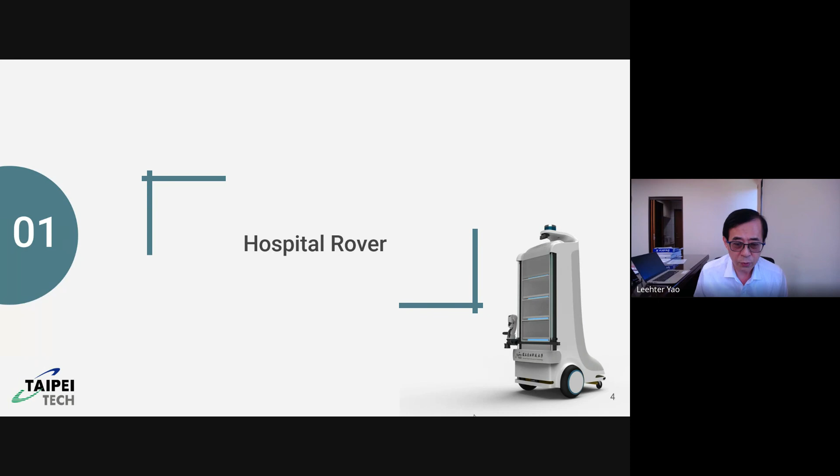The first thing I'm going to share with you is a typical example of integration of AI with machine, which I call the hospital rover.

The hospital rover is motivated by the idea that we usually take public transportation or drive a car from one place to our destination, but is it possible that we don't have to drive ourselves in order to carry objects? So we are going to design an autonomous robot that can carry objects for us.

The hospital rover comes from my campus rover. This is my first generation and second generation. Some professors in our industrial design department designed the outlook for me, so it looked more beautiful.

In this campus rover, we have 3D LiDAR on the top and 2D LiDAR at the bottom. We also have a robot arm to operate the elevator, and a depth camera that can not only sense images but also measure distance. And of course, we have actuators.

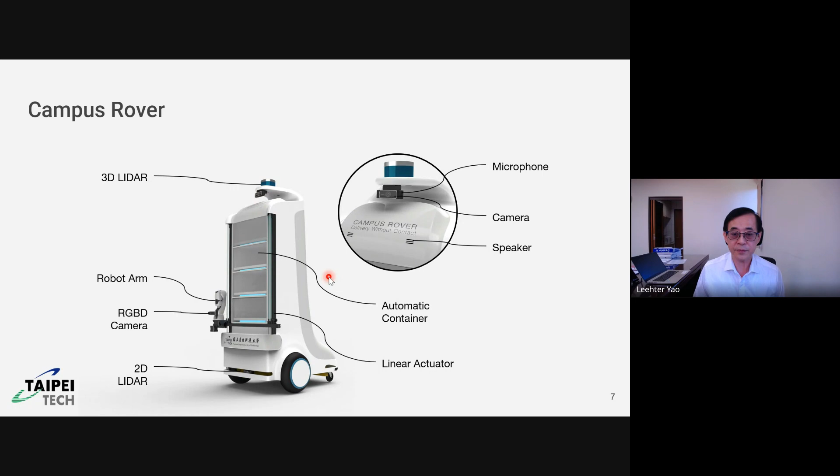My goal is to design an autonomous vehicle or mobile robot for indoor use. I'm not going to compete with Tesla, Benz, or BMW - they have thousands and thousands of brilliant engineers to design autonomous cars running on the road.

So there is a space for us to design the so-called indoor autonomous vehicle. That's why I was motivated to design my indoor-use autonomous vehicle, and of course, some of the functions I had to consider before my design.

I have to make sure that my indoor autonomous vehicle also has a limited function of outdoor self-driving capability. Of course, we have to emphasize the self-driving in the indoor space, and the indoor environment is much more complicated than the outdoor environment.

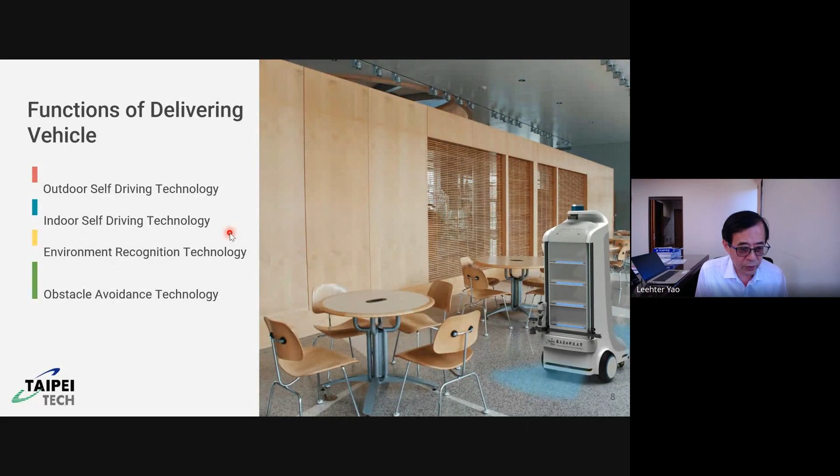So we also have to have the capability to do environment recognition, and most of the time the building is full of people and stationary obstacles. So obstacle avoidance technology is also very important for the indoor autonomous vehicle.

Since the mobile robot is operating inside the building, if we want to go from this floor to another floor, we need to design this robot to be capable of operating the elevator. So we have to design this robot arm to press the button of the elevator.

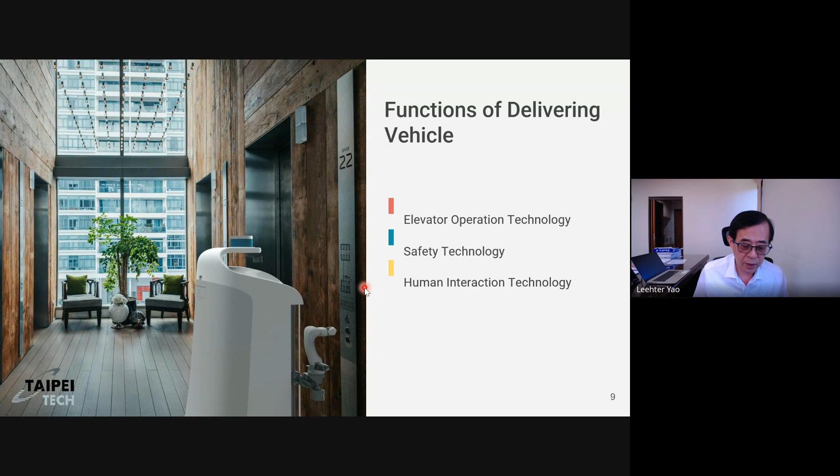Because this robot is running inside the building, we also have to be careful about safety. Finally, we also have to have a good human interaction interface so that it will be friendly to users.

Because we want to design the robot to deliver objects from one place to another, we don't want this—see, for example, we have a drawer here, and we put the object we want to deliver inside this drawer. During the traveling, we don't want anyone other than the intended recipient to open the drawer easily, so that the object can be taken.

We don't want people who are not the target personnel to receive these objects. So we have to have good authentication technology to make sure that the one who opens the drawer is the one we want to send the object to. Otherwise, anyone else cannot open the drawer to take away the objects.

During the traveling, we also have to have some lighting and audio signaling technology to remind pedestrians that this robot is coming, so that pedestrians will be more careful about this mobile robot.

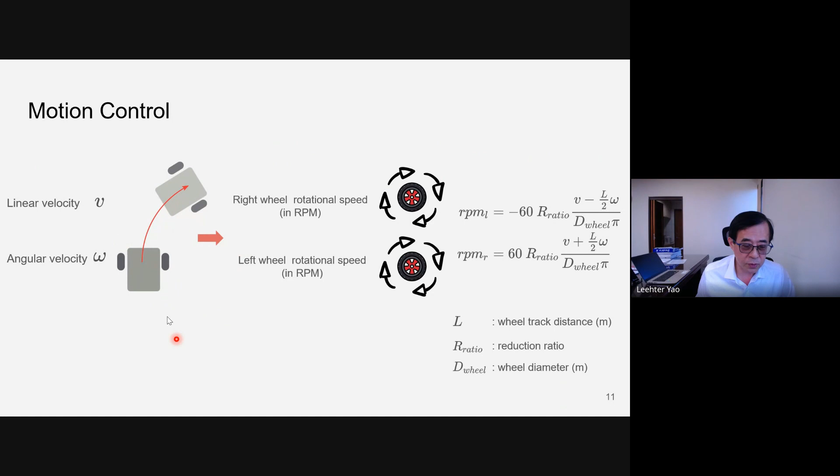We also have to worry about the odometry of the robot, so that we know where this robot runs, and we can calculate the path of this robot.

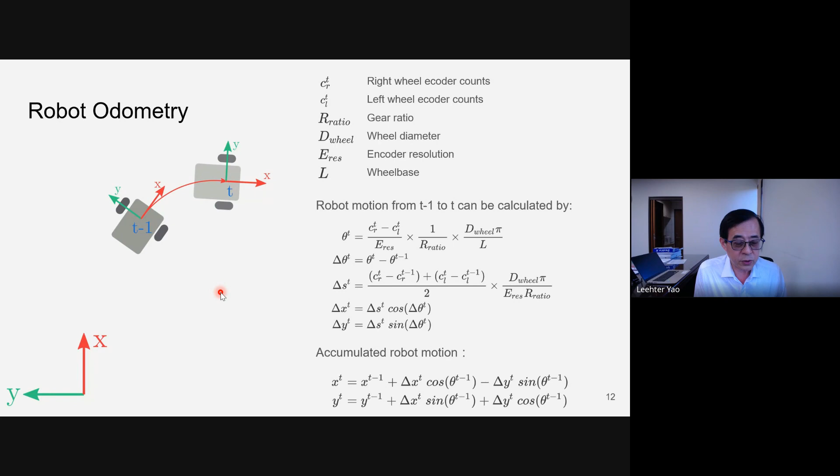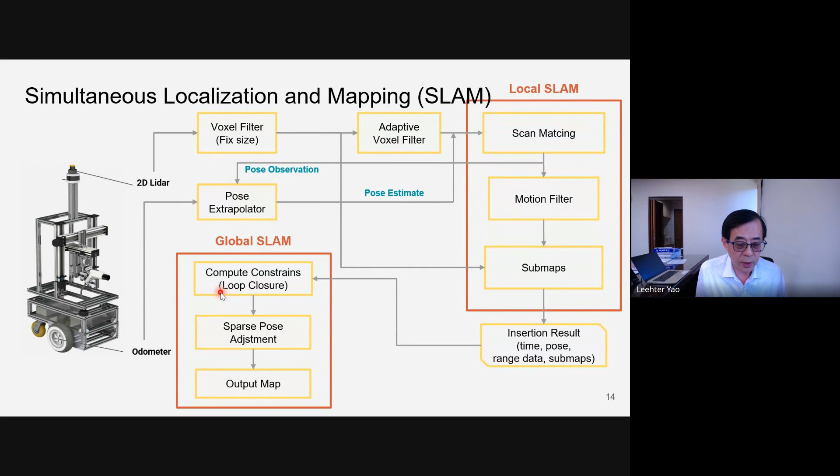We also have to have the capability to design the traveling route or path. Before doing that, we have to use the so-called SLAM, simultaneous localization and mapping technology, so that this robot is able to collect the map inside the building.

For example, before designing the path, we control the robot to go through the environment several times. This mobile robot travels around, and during the traveling we collect the map information. Then, based on this map information, we will be able to design our SLAM.

We design the route based on the map this mobile robot collects, and we put several decision points here, so that wherever this robot is called to go, it is able to automatically calculate the best route. In this mobile robot, we use the so-called Dijkstra routing algorithm to automatically calculate the route.

During the traveling, we also have to design a CNN to recognize the objects this mobile robot might encounter, especially since this robot is going to be used in the hospital. So we have to recognize pedestrians, wheelchairs, beds, or other kinds of vehicles used in the hospital, and of course we also have to recognize stationary obstacles and the elevator.

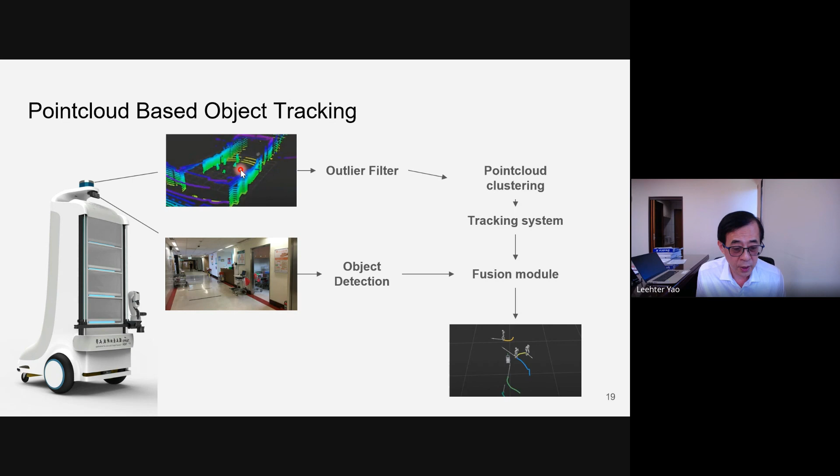So with different kinds of moving obstacles first detected by the 3D LiDAR, we then use sensor fusion technology to make sure what this object is, then design different obstacle avoidance approaches for different obstacles.

And of course, in order to better estimate the velocity of the moving obstacles, we have to design a Kalman filter so that the velocity can be estimated more accurately.

And this is an environment in the hospital. We have to use CNN, training on many different objects that this mobile robot might encounter in the hospital, so that we could recognize, I hope, 90% of the objects this robot might encounter.

So based on the sensor fusion of the 3D LiDAR and the camera, now we are able to know the objects.

Then we design reinforcement learning to do obstacle avoidance. The reason we use a reinforcement learning algorithm is because the indoor environment is much more complicated than the outdoor environment, and the space we could use to avoid obstacles is very limited and also very complicated. So we would like to use a reinforcement learning algorithm.

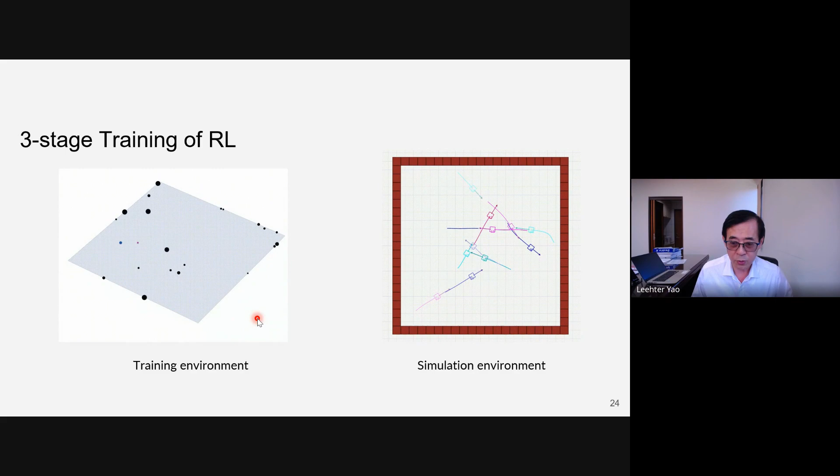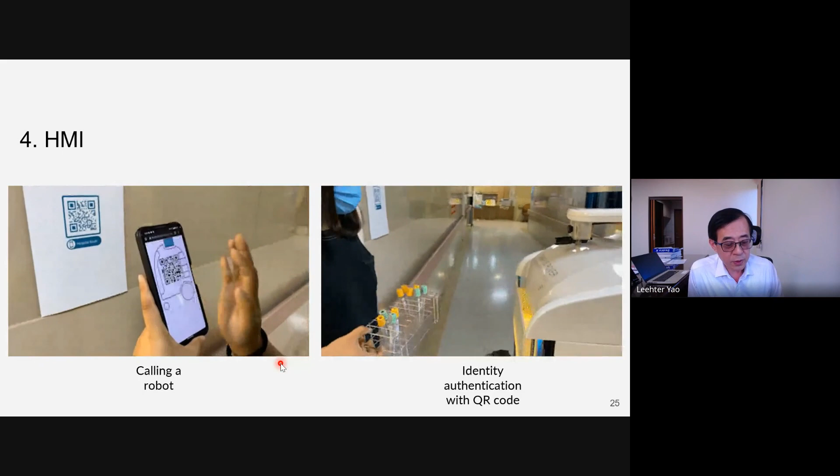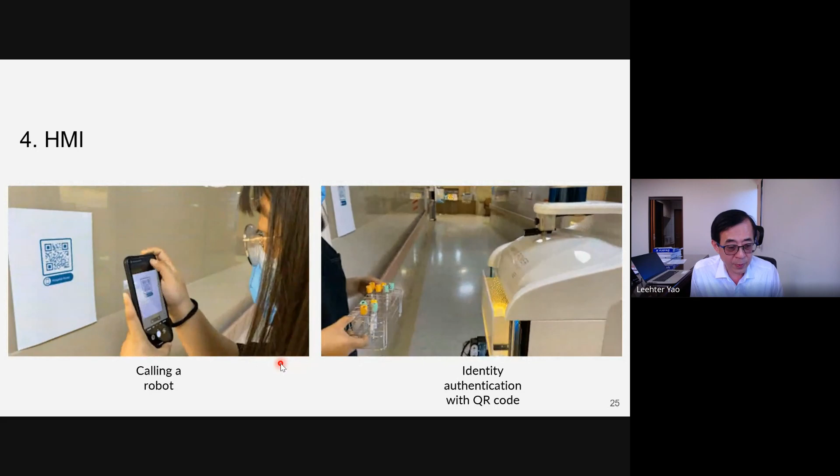All right, so we also have to design for, say, a doctor in the hospital. Now we use this mobile robot to send medicine from the pharmacy to the nurse station, so that the nurse station will open the door and dispatch the medicine to the patient in each room.

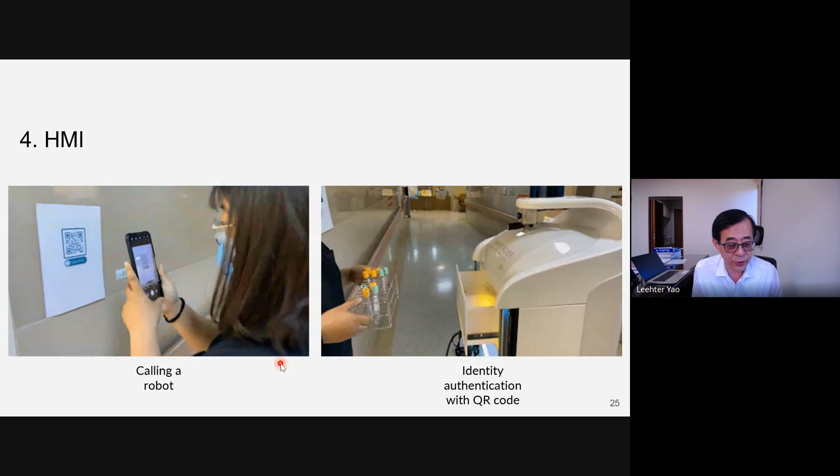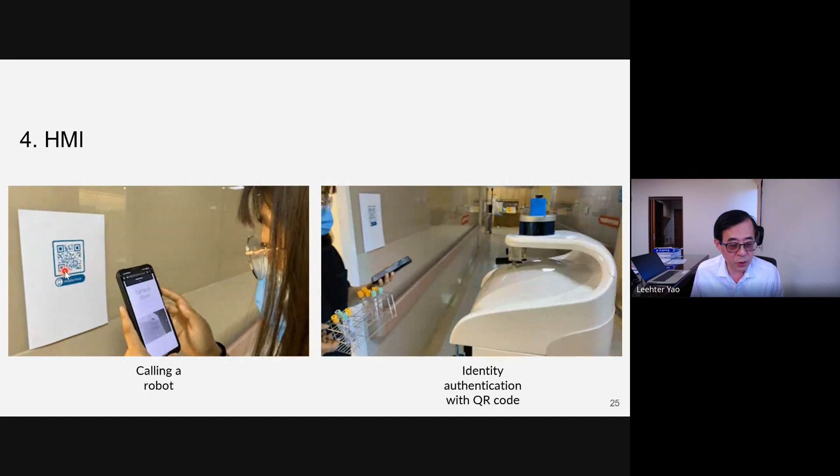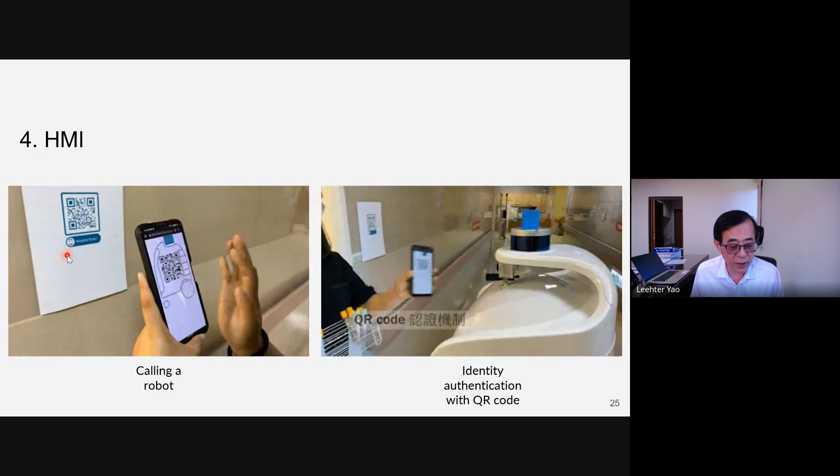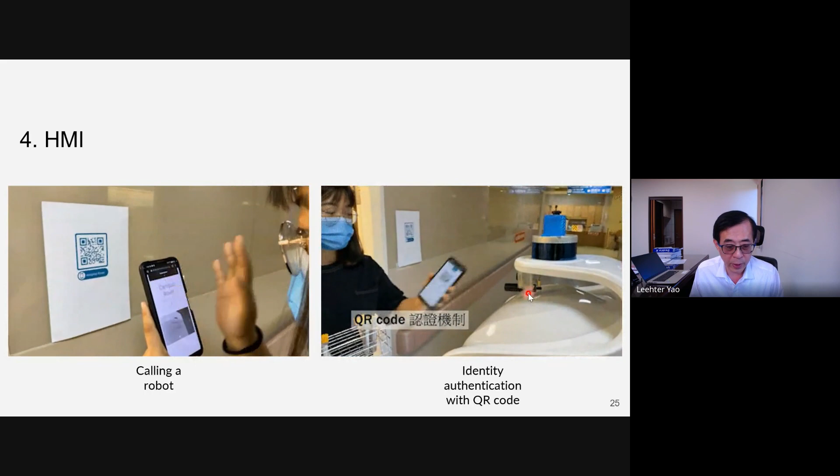So how do you call this robot? Maybe this robot is somewhere inside this building, so we design this QR code. We could put this QR code at every space inside this building, so that if the staff want to call this robot, they can scan this QR code. Then through Wi-Fi, this message will send to the robot, and this mobile robot will know where you are, and then it will travel. If necessary, it will also automatically operate the elevator to come to this place.

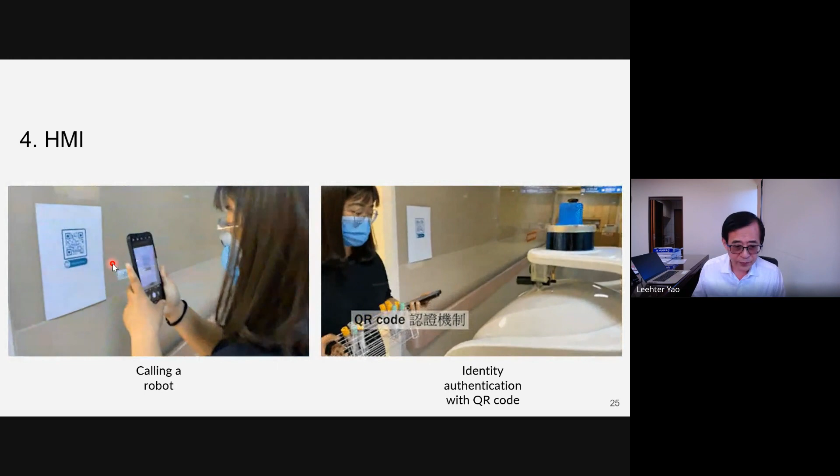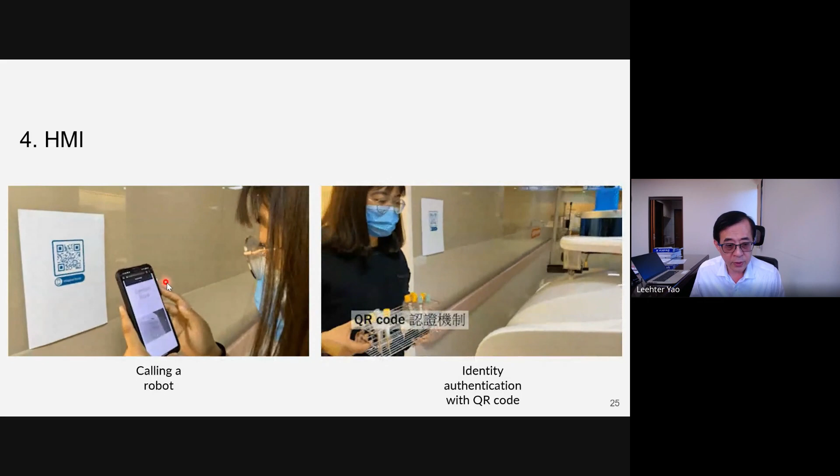Because we designed this app for the robot, if you call this robot, we will also at the same time give you another QR code. So you show the QR code to the robot, then the robot knows that you are the caller. So no one can ask this mobile robot to open the drawer except the caller and the receiver.

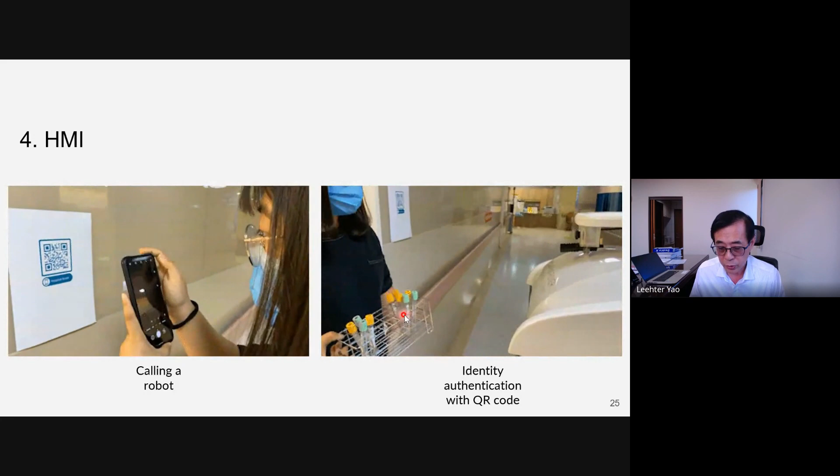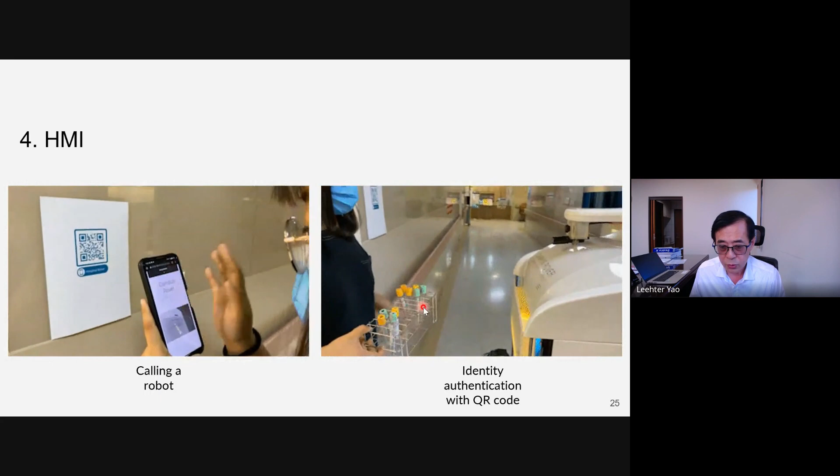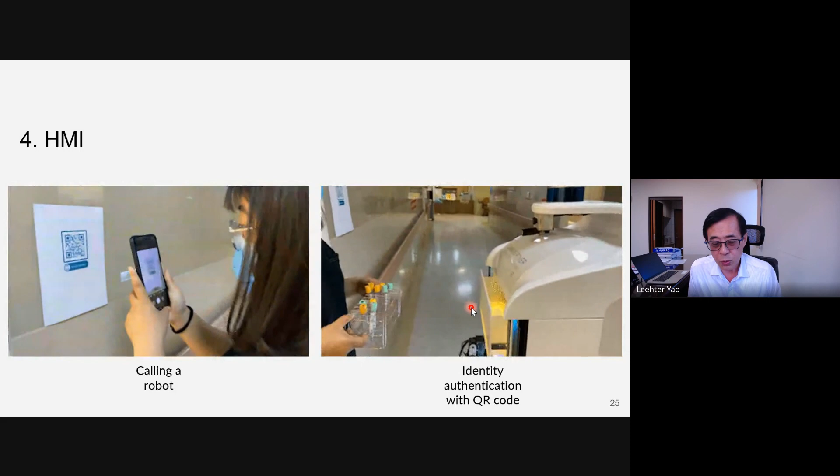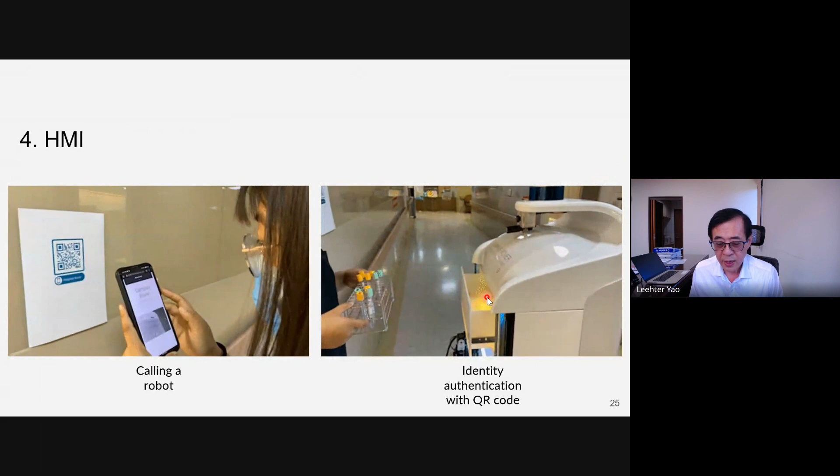You show the robot your QR code, and the drawer will open, and you can put the object to be delivered into the drawer. Your receiver also will receive the same QR code, so when the receiver shows the QR code, the object placed at the corresponding drawer will open, so that the receiver can only open the drawer you put the object into, and cannot open the other drawers at the same time.

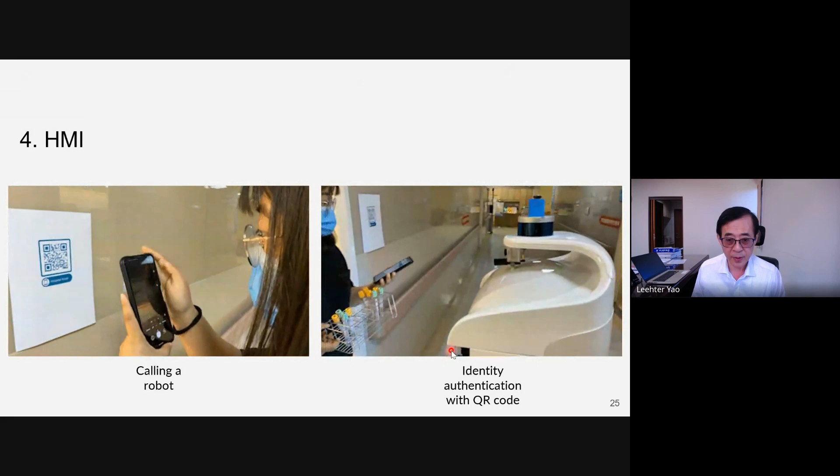We also design some voice control functions so that if necessary, the user could use voice control to interact with the mobile robot. And we also have some gesture recognition functions so that we could use gesture recognition to control the robot with some simple actions.

The most difficult part is how to control the robot to get into the elevator. So when this robot uses SLAM to move itself to the elevator, then the mobile robot first needs to recognize the panel outside of the elevator.

The panel generally shows going up or going down. So we have to recognize this panel first, and then the mobile robot will use visual servo technique to go to the panel, then operate the elevator.

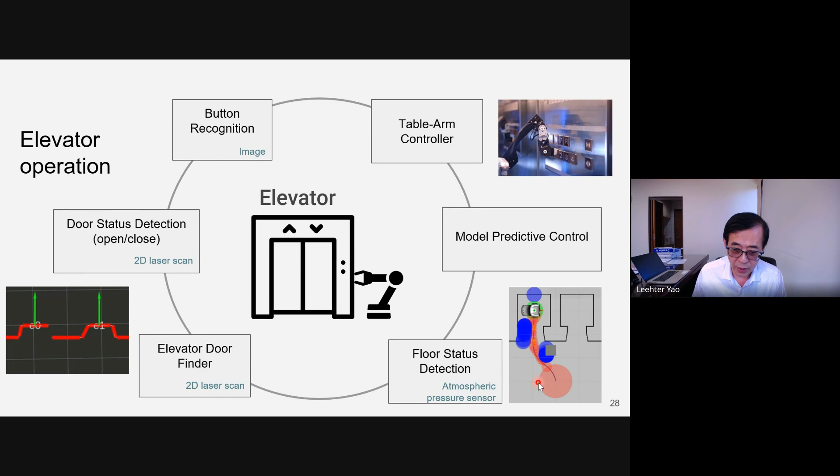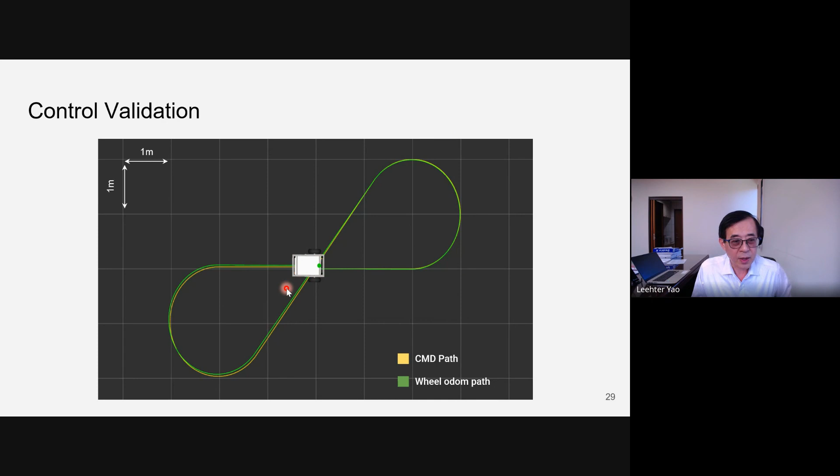So this is the elevator operation. From time to time we have to make sure that the motor control or the odometry is still okay, so we usually use this kind of route to make sure the mobile robot doesn't need to fine tune.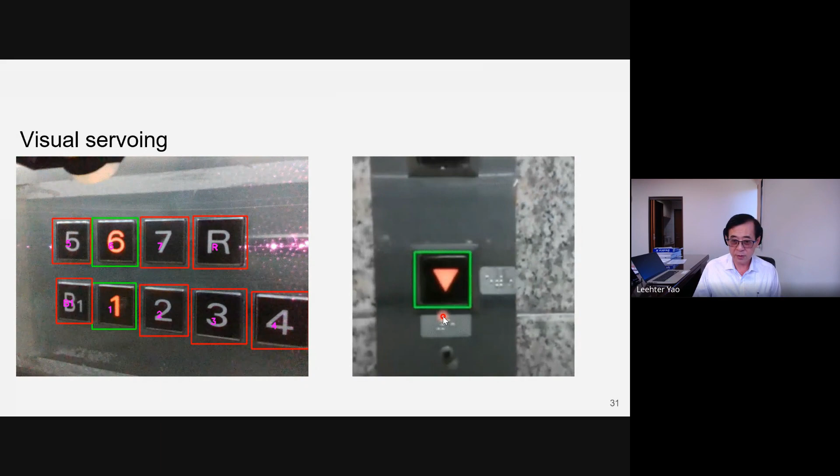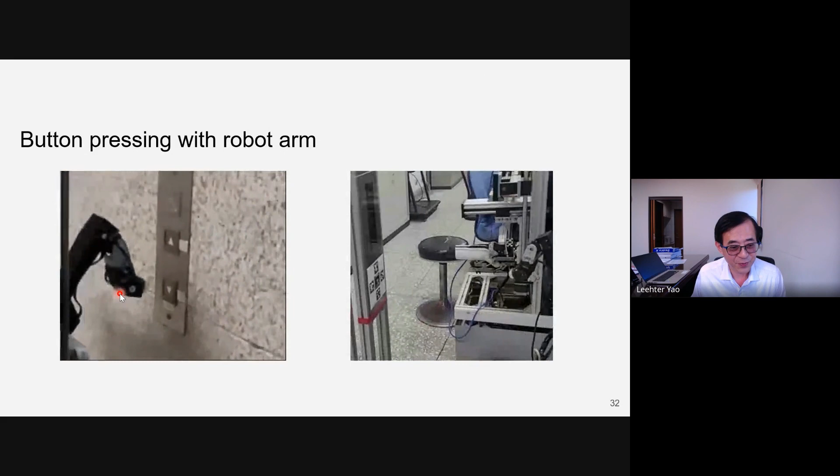So then we designed this as well. We use a 3D printer to make this robot arm by ourselves. So we designed this little 4 degree of freedom mobile arm to press the button for the mobile robot.

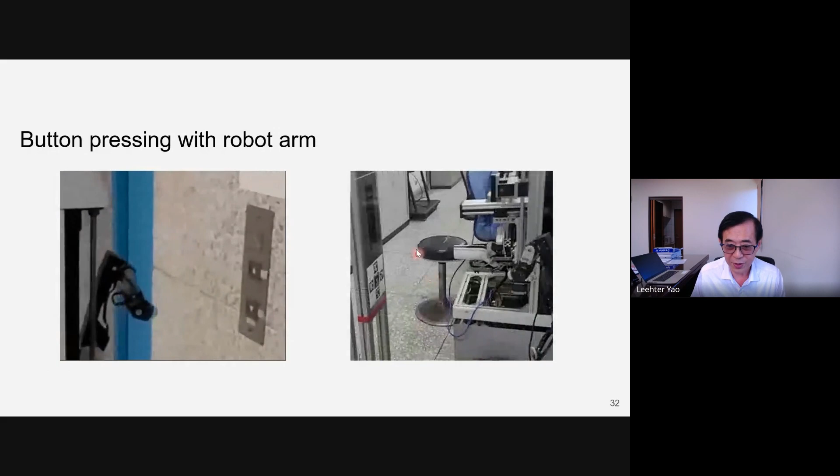Something like this. And we also have a test environment inside our lab.

So to precisely navigate in the bigger space, we use SLAM to travel from one place to the other place. And then when the mobile robot moves close to the target, we use model predictive control to delicately control the motor so that it will move in a precise way to the target.

Especially, we integrate visual servoing with the model predictive control, and we modified model predictive control so that this robot is able to do this. We call it the bubble MPC.

This bubble can adjust the size so that we could follow the path designed by MPC. At the same time, we could still save some safe margin for the traveling, so that this mobile robot will not bump into the obstacles.

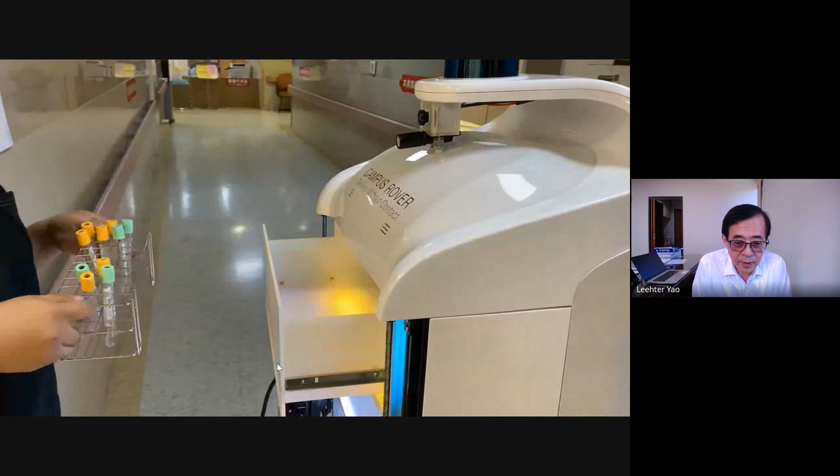And this person showed the QR code to the robot, and the corresponding drawer will be open. And then use voice control to tell the robot that I'm done.

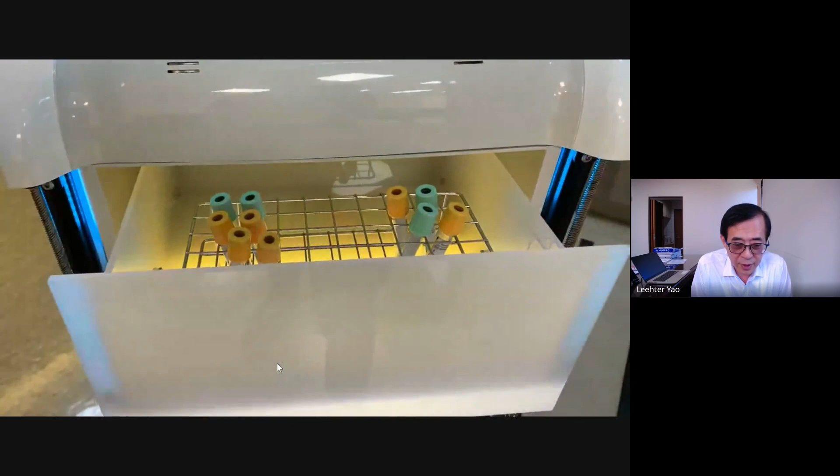So the caller says thank you. Thank you means that, well, I'm done, so you can move now. So it will move to the target space.

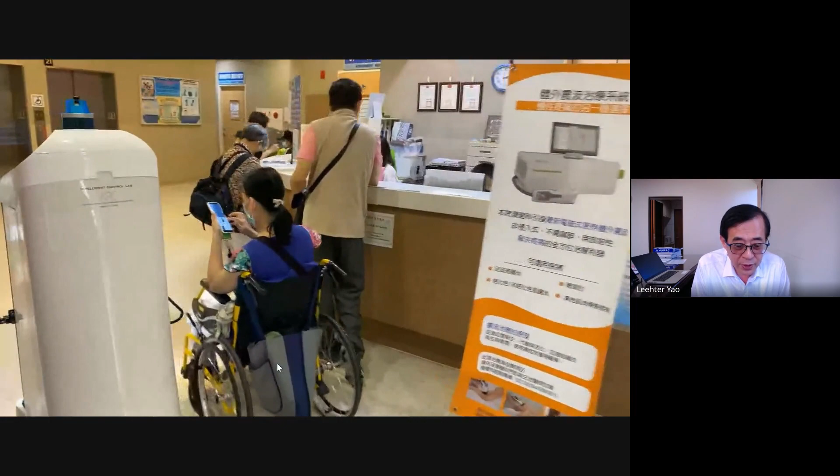At the corner, the robot has to move slowly, because as you can see, it is very crowded inside the hospital. At a sharp corner, the mobile robot has to slow down, and now the robot will operate the elevator.

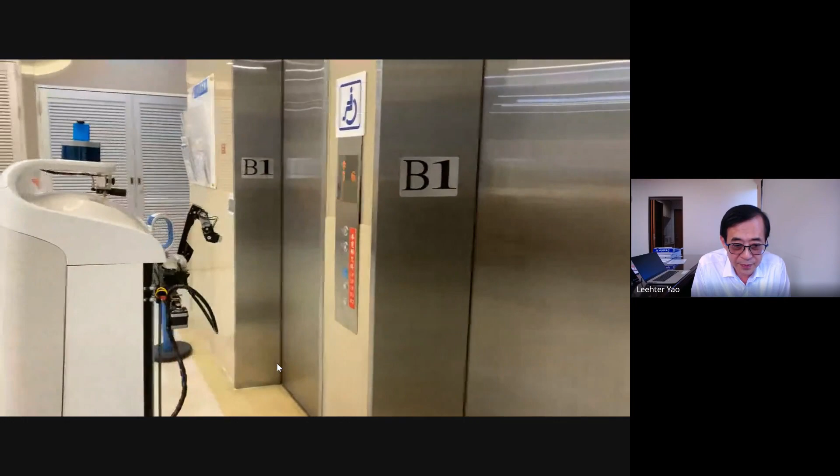It recognizes the button and uses visual servoing to approach the panel and press the button.

And then it will back in and come to the place right in front of the elevator. And then we'll get in the elevator, and then press the button again.

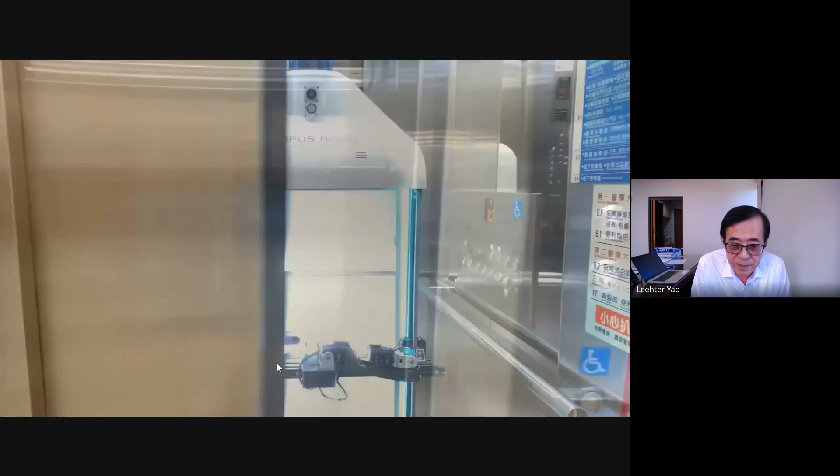As you can see, we also have some lighting and some signaling. And then when it is there, we will send a message to the receiver, and then the receiver uses his received QR code to show the robot, and the robot will open the door for him.

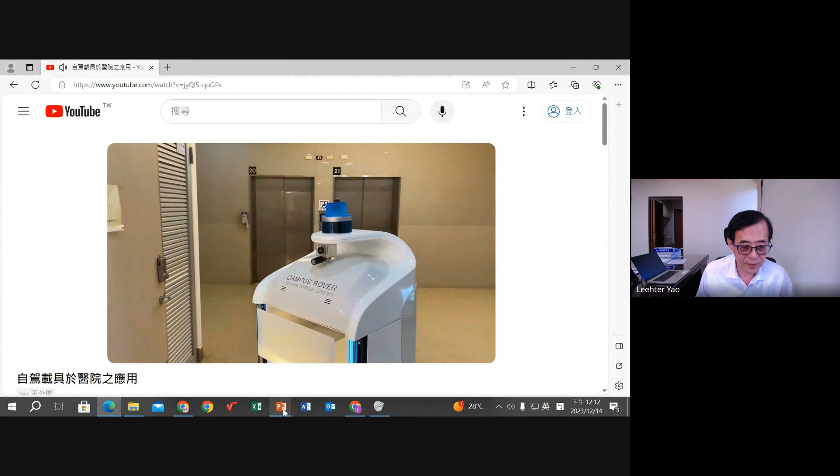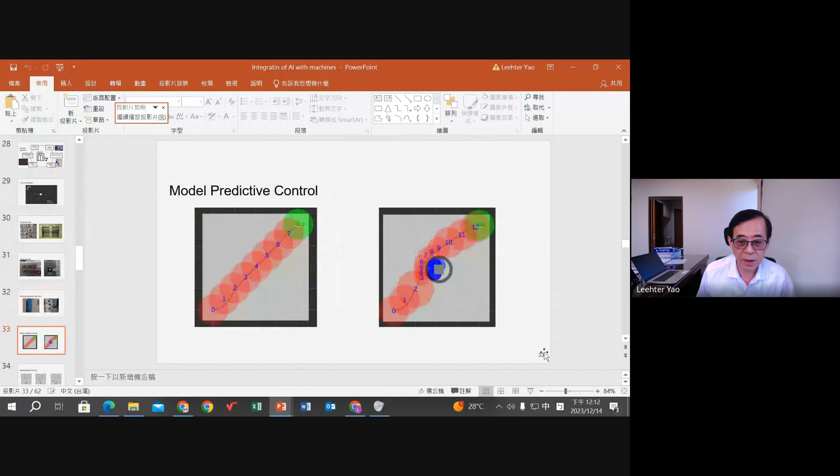Okay, so this is it.

The next thing, similar idea. We also work with an electric motorcycle company in Taiwan. Their idea is that can we use our robot to charge the electric motorcycle for this company? So this is the idea of charging, motorcycle charging.

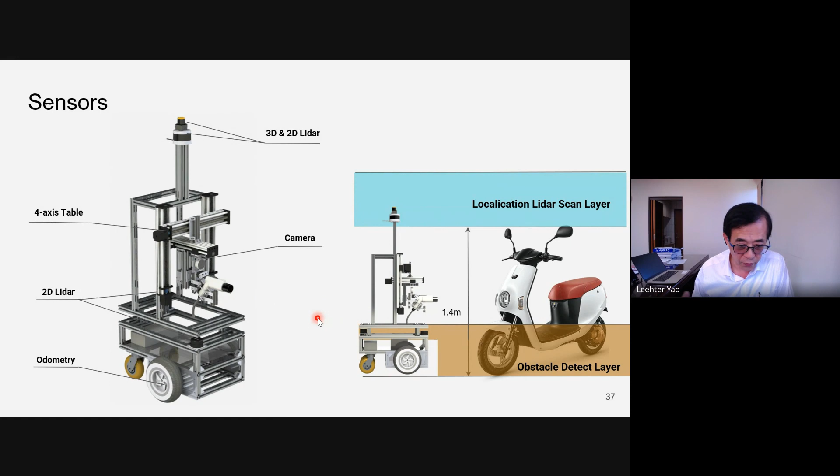As you can see, we have a charger here. The idea is that this mobile robot will carry batteries, so if any electric motorcycle needs to be charged, it will call the robot, and this robot will carry the battery and charge the motorcycle.

So why do we want to do that? Because in our university we have about 2,000 motorcycles, and by the year 2030, Taiwan will no longer allow gasoline motorcycles. Every motorcycle needs to be electric.

It is not possible for the school to build a power system with so much capacity that when 2,000 electric motorcycles come to campus in the morning, our power system could afford charging all of them. So the idea is, without modifying the power system too much inside the campus, can we build several charging robots so that if any motorcycle needs to be charged, they can call it, and this mobile robot will automatically go to the place and charge the motorcycle. This is the idea, and this is what the company we will cooperate with wants to do.

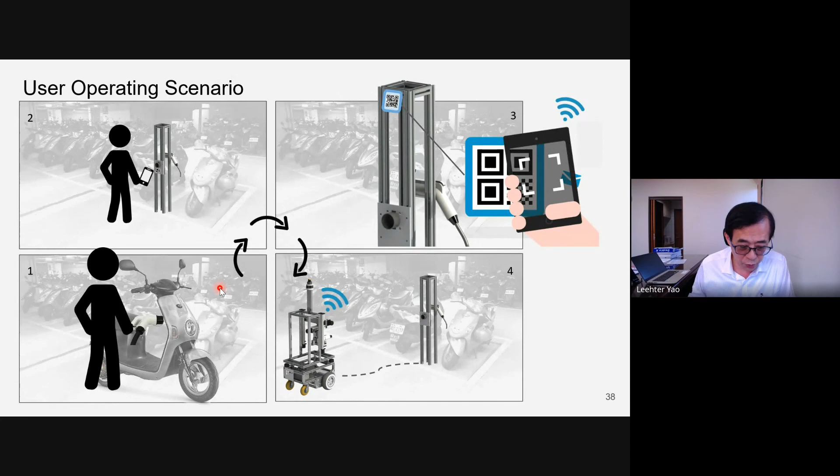We put AprilTag here. This is the charging pole, and every charging pole has a charging connector, but there's no power connected to the connector, so that the campus power system can still afford it, because no electricity is used here.

In the future we may need 2,000 charging poles like this. If we build the power system to connect electricity to each charging pole, that's a big load. So our charging robot will come to the charging pole and charge the motorcycle for it.

We don't want this charging robot to touch the user's motorcycle. As you can see, we have a charging connector, a charging plug here. So if this is the motorcycle to be charged, the user will take this charging connector and plug it into his motorcycle's battery.

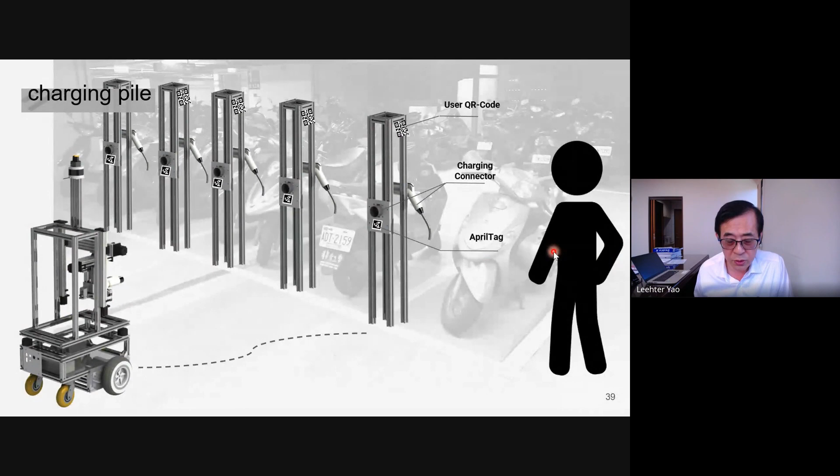This charging connector is connected with this connector here, so when the mobile robot comes to this charging pole, this charging plug will plug into this connector instead of the connector at the user's motorcycle. This way the mobile robot avoids contacting the user's motorcycle. So this is the basic idea.

The SLAM and obstacle avoidance are almost the same as the hospital rover, except that we have to worry about how to control the mobile robot to move to the charging pole, and the visual servo camera will recognize the charging connector and make sure that this charging plug directly connects to the connector.

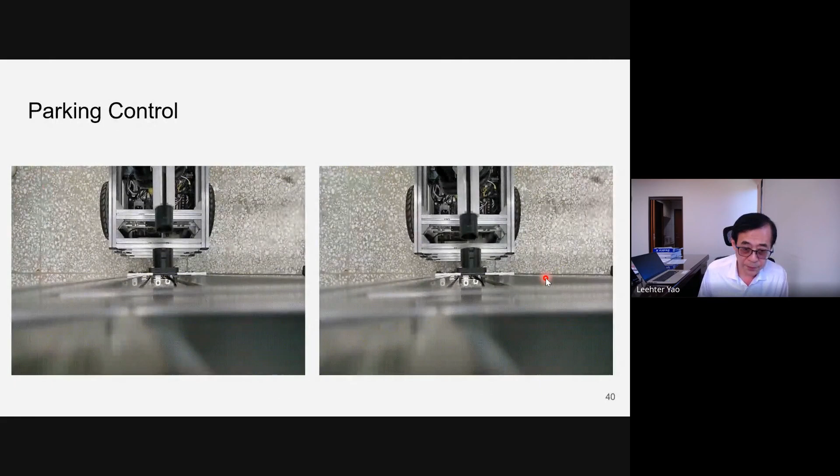This is the basic idea, and we put a tag here so that by looking at the tag, the mobile robot is able to tell the direction and distance of this charging pole.

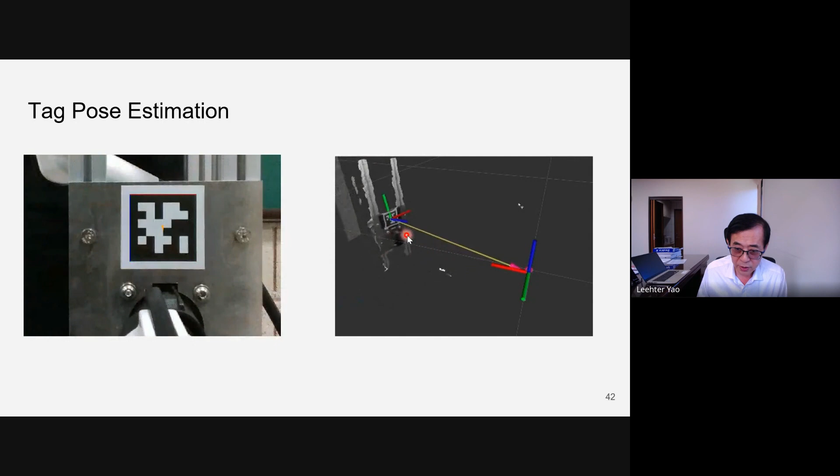We still use SLAM to control the robot when it gets into the neighborhood of the charging pole, and then we use visual servoing to delicately move to the connector.

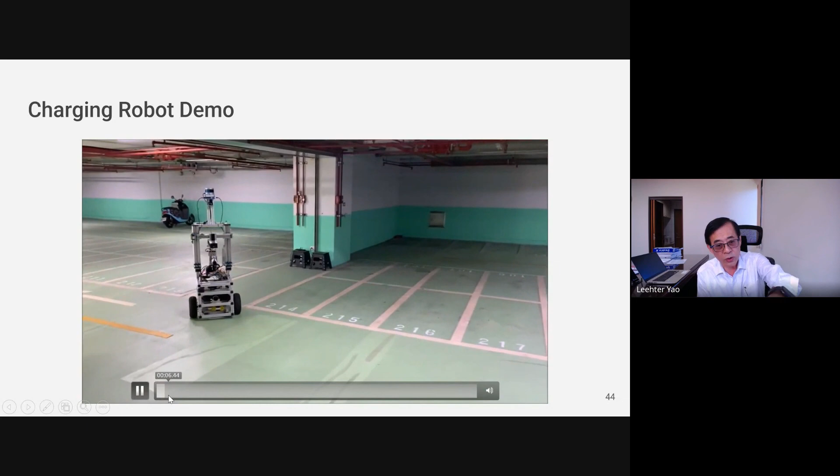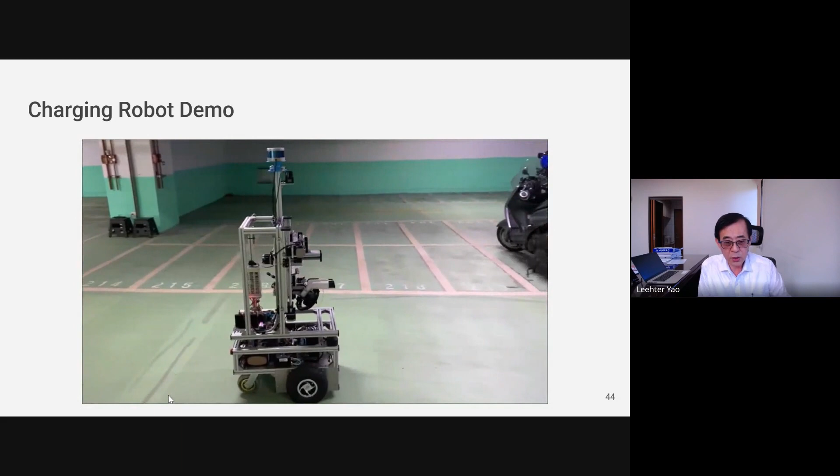Let me show you a demo here. This robot is parked at the corner of the parking space. When it is called by the driver, the mobile robot uses SLAM to move to the place where this charging pole is located.

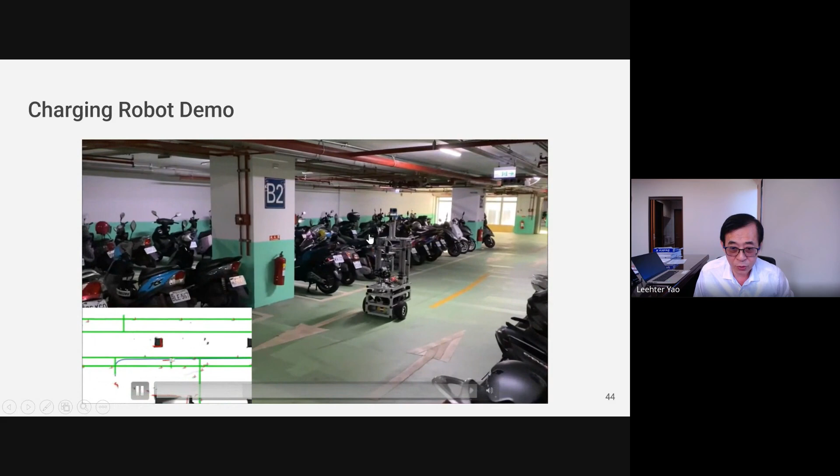As you can see, we put the LiDAR a bit higher because we do not want to sense the motorcycle, since it might change position from time to time. So we have to sense the environment instead, so that the SLAM will be more accurate.

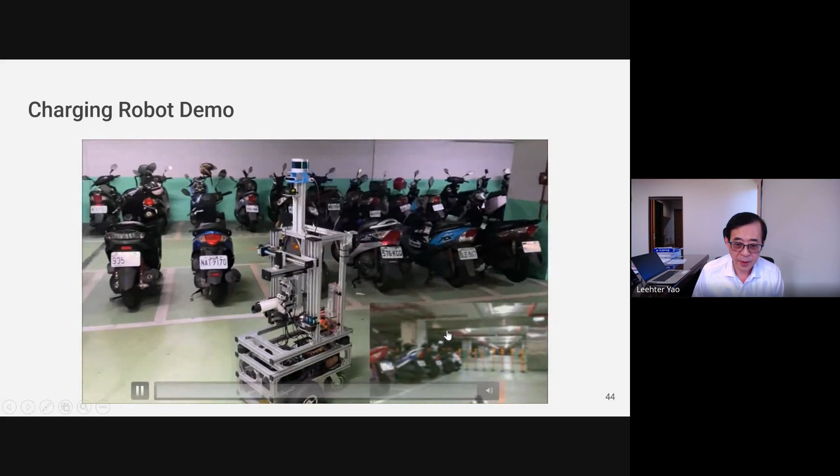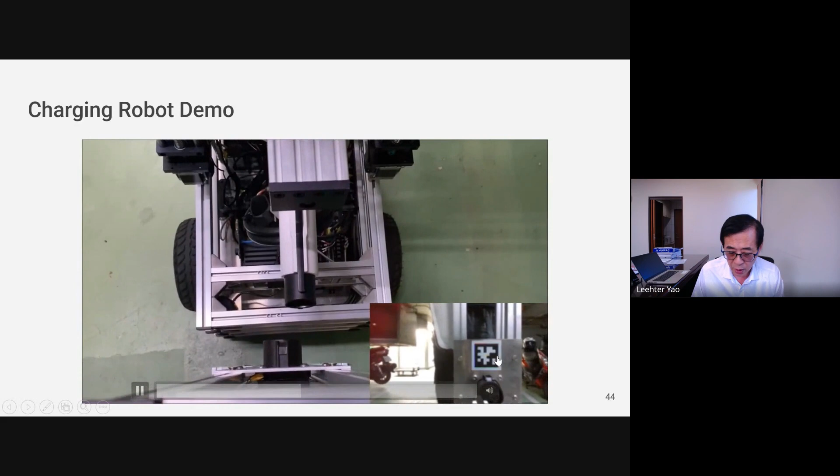We also use image recognition, and when this mobile robot sees the tag here, we use visual servoing to detect the distance and direction of the tag, so that we know where the connector is. Then we build a table to push the plug into the connector.

As you can see, it has to be very accurate. This is the charger. When it is connected, the charger starts, and when charging is finished, the mobile robot unplugs the plug and goes back to the place to wait for the next caller.

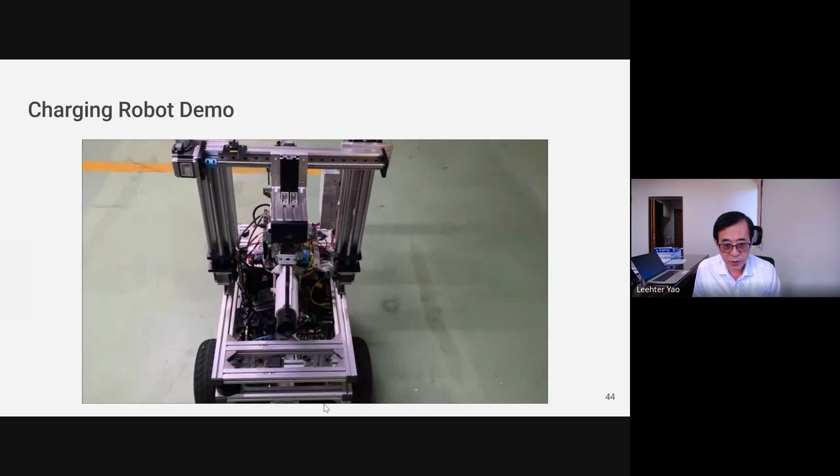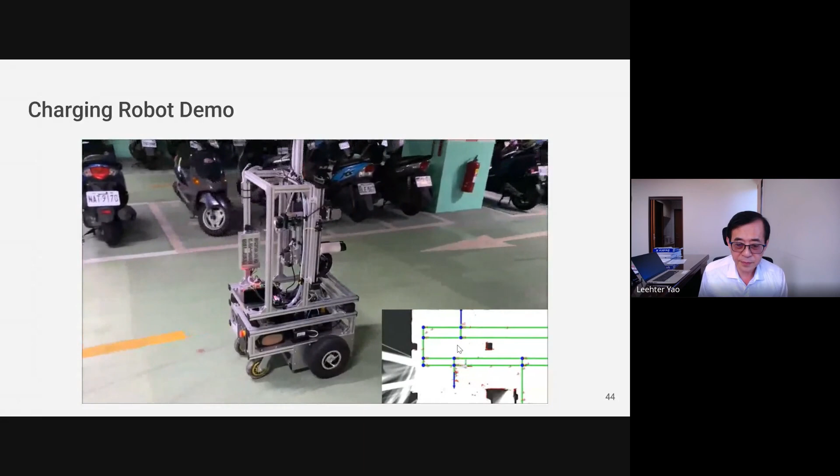And this is the SLAM. So this is the charging robot.

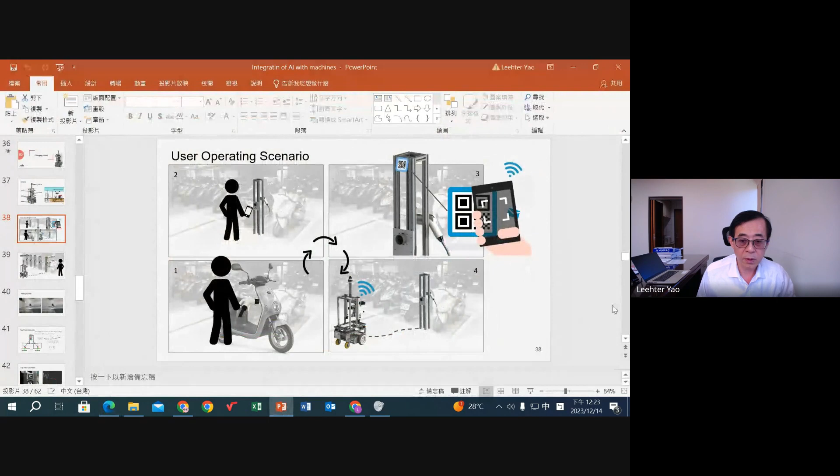Okay, I have very limited time now, so finally I will talk about robot fish. I use a 3D printer to print the fish, and then I use two servo motors to mimic the swimming of a fish.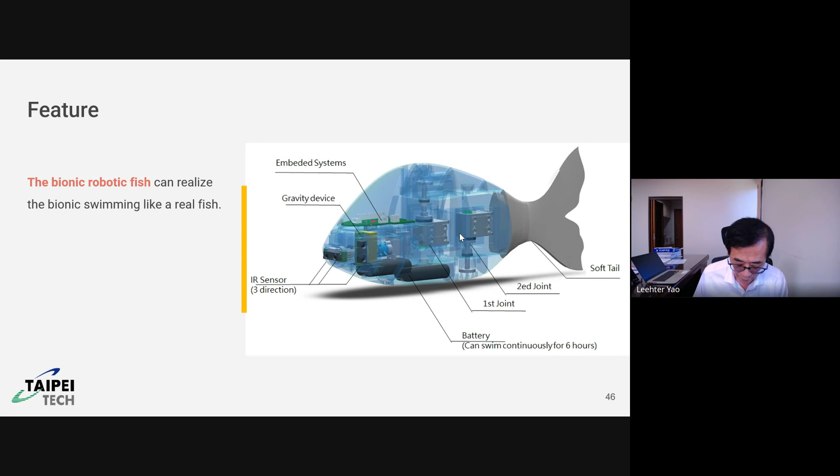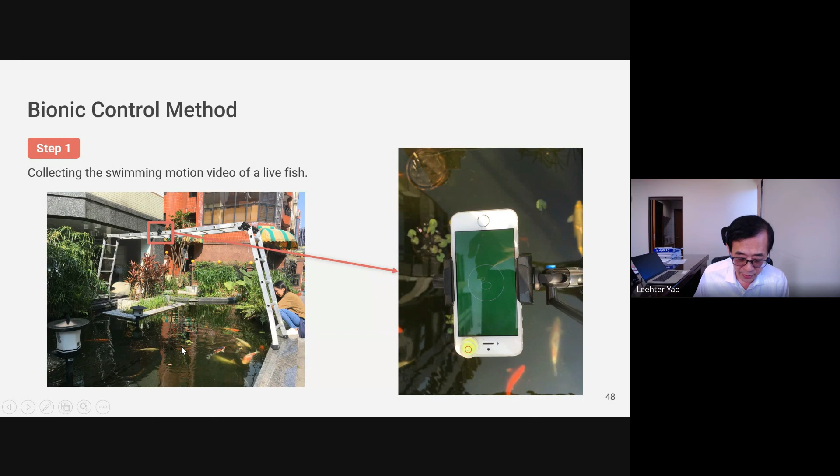This is the first version of my fish. It's not that beautiful yet. The way we do that is we put some camera on top of a pond, and then we record the fish swimming, and then we analyze the fish swimming, and we decided to use only two servo motors.

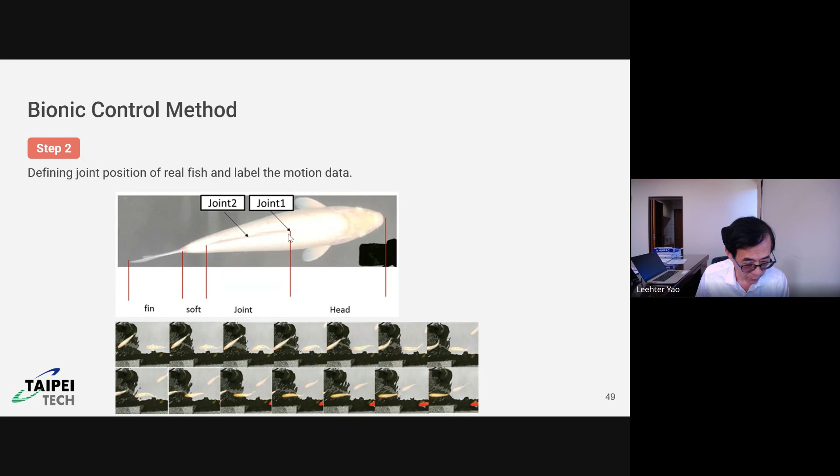When we analyze the fish swimming video, we select two joints in the fish body, and we analyze the variation of those two joints while the fish is swimming, and then we mimic the fish swimming by delicately controlling the two servo motors. So this is the two joints we analyzed, and then we control the motor to mimic the swimming.

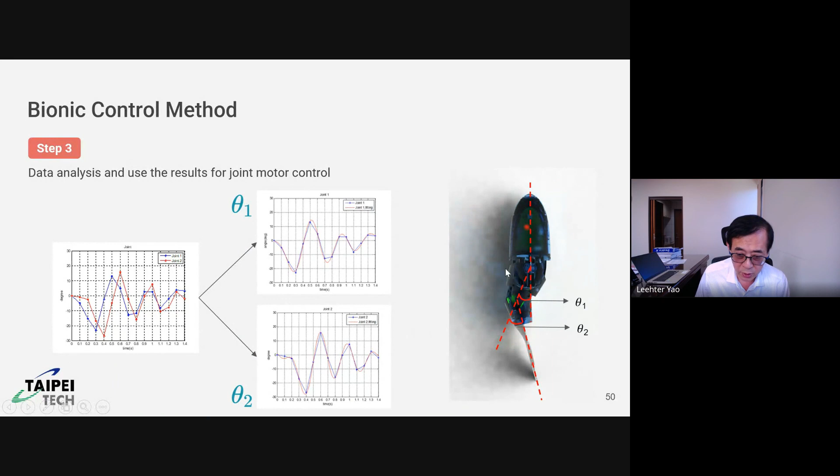So finally this is the way. We have a pool in our lab, so finally we build this fish like this.

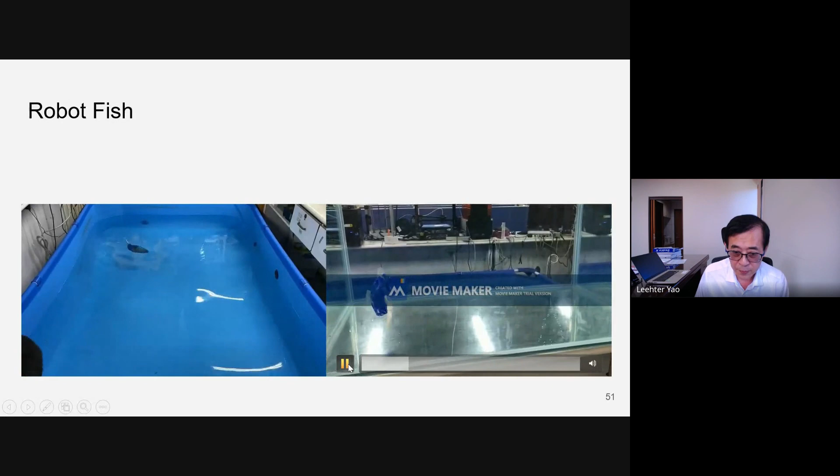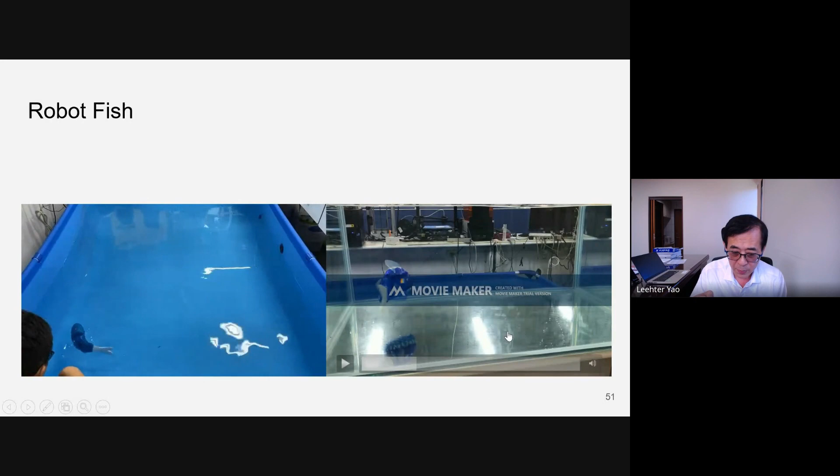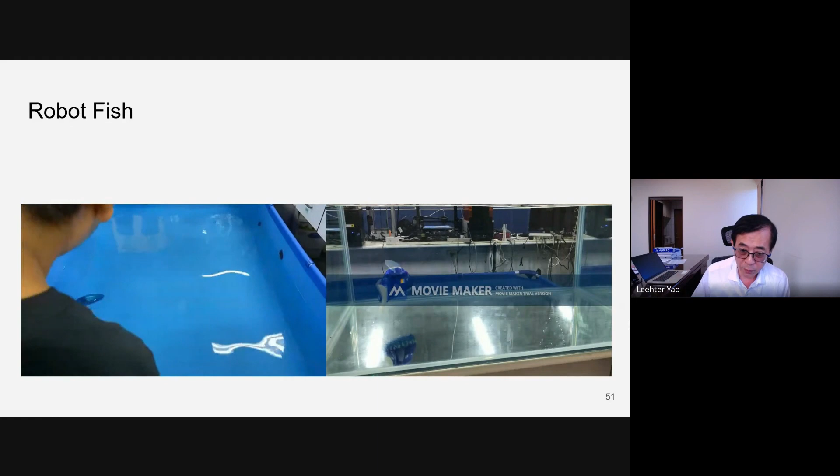We also watch the diving and rising of the fish. The way we control the diving is that we have another stepping motor inside the fish. When the stepping motor pushes the heavy object forward, the fish head will go down.

If we control those two servo motors, then the tail sweeps, and the fish can go down or go up. This is the way we control the fish, so it's kind of complicated. So I have a video to show you how we build this fish.

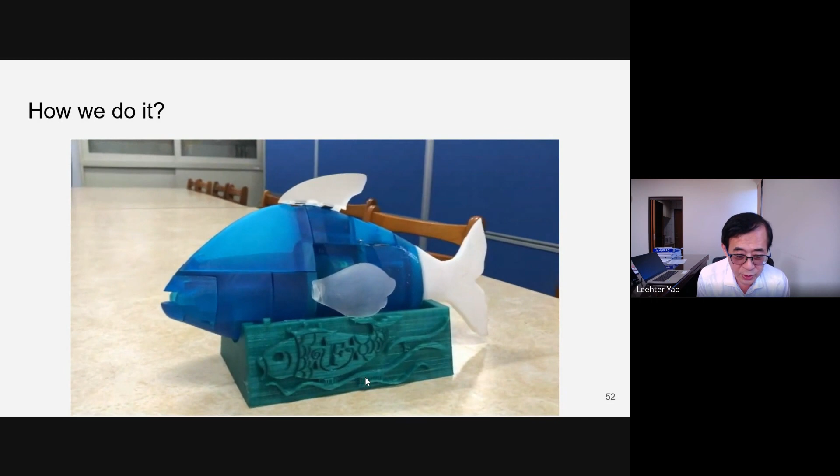I like fish very much, so that's why I built this robot fish. We record fish swimming, and then we analyze the movement of the fish, and so we design our mimetic robot fish to mimic fish swimming, and we use a 3D printer to print the fish, and of course all those tails and gills.

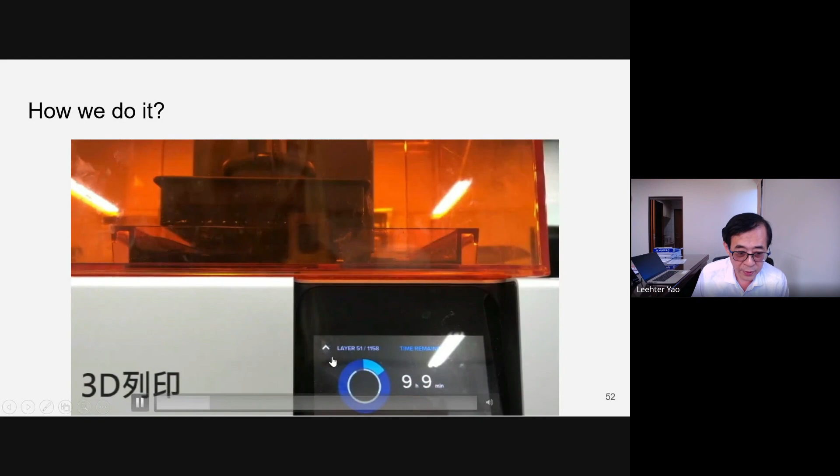This is our 3D printing, using a 3D printer to print those fish. And of course, we have to make it waterproof.

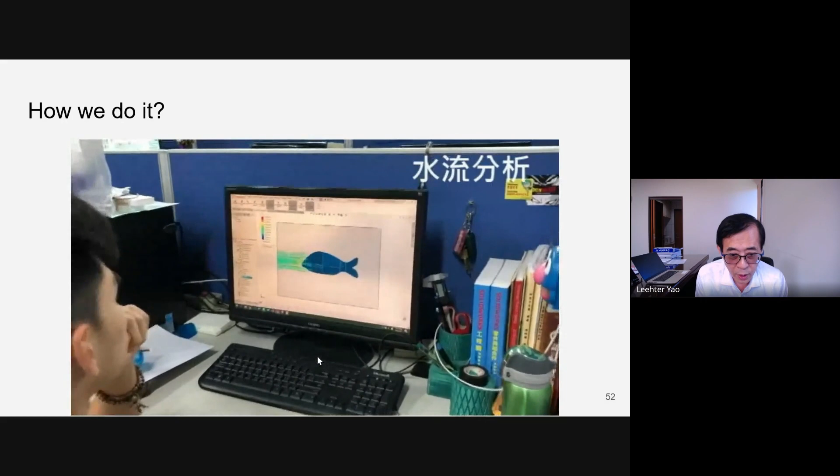We use SolidWorks to analyze the water flow on the fish body. And then they go back to the pond again and watch closely the fish again, and we analyze this. This is how we do it.

All right, so this is something like this.

And we could also make this fish like doing a fishing game without hurting real fish. We can enjoy the joy of fishing with our rod, and there's a magnet, and then we can enjoy the pushing of the fish, fish struggling, something like this. It's very interesting, so you don't have to hurt the fish.

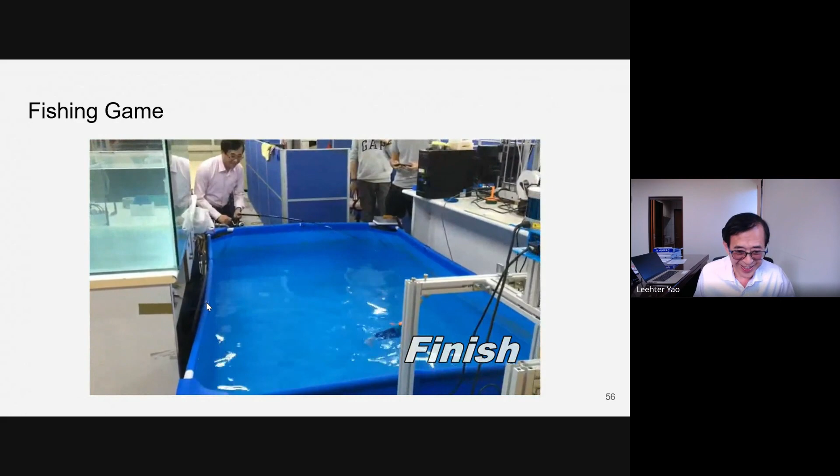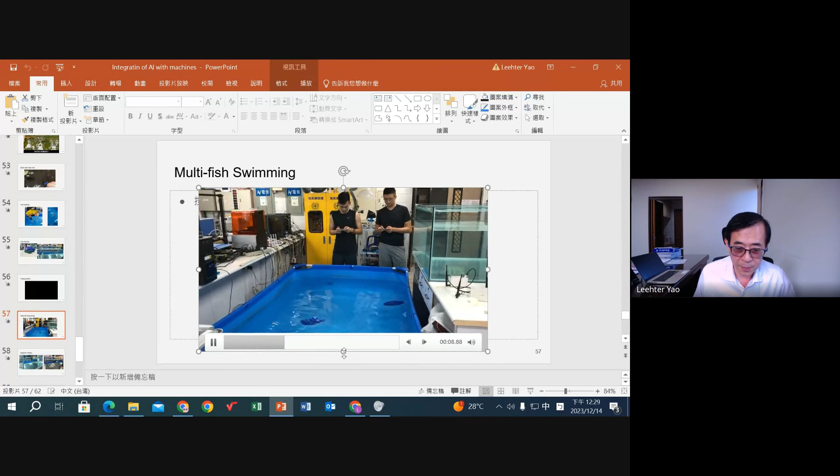You see, I'm doing fishing now in my lab. And we also use remote control to control the fish. We can allow two or three people to race their fish, something like this.

Now the fish is more beautiful. Let me show you the recent fish. As you can see, the fish now is more beautiful because now I learned some painting, so we can put some painting on the fish body, and of course we have a more delicate 3D printer.

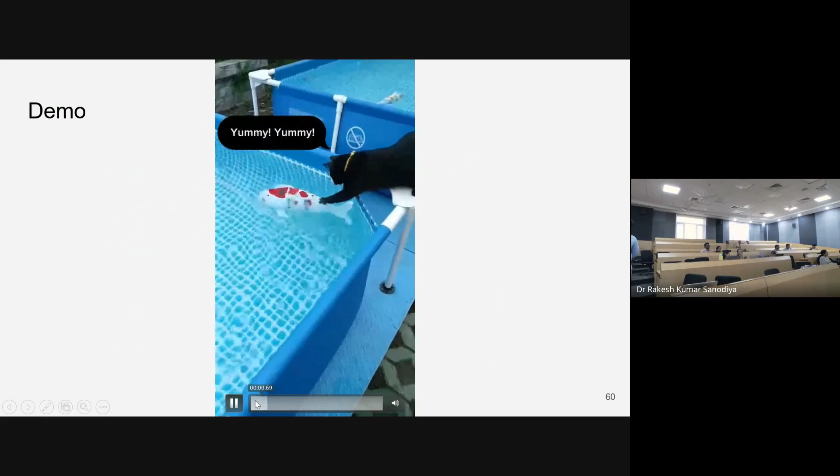Interestingly, very interesting, even the cat cannot recognize it is a real fish or not. We noticed that a cat is watching our fish.

So, all right, conclusion. Well, in order to have AI in the industry, we first need to have internet and IoT, and then collect enough data, big data, in every phase of the industry. And then when it is mature, then we will be able to...

When we have enough big data, we know it's about time to put AI into the industry. If we put AI into the industry and find that production rates could be increased, life could be more convenient, then we could commercialize the AI technology deeper and wider, and we will have a bigger market, more people enjoy AI, and the capital could be in place. And then if we have capital in place, we have more capital to develop AI. So this is a positive cycle.